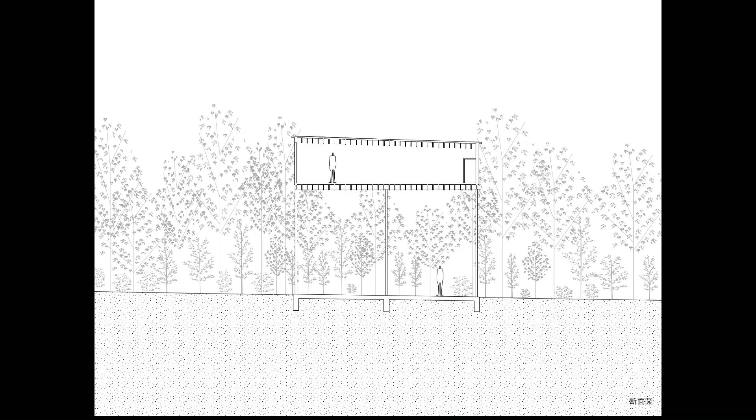I really focused on the pilotis in this project. Of course it wasn't simple, but in the end I proposed to the client: let's make a very high pilotis in the forest. It has 6.5 meters height, really high as a pilotis for a house. The upper floor is very tight, compact and intimate, only 1.9 meters height at the lowest point to the bottom of the beam. The first floor is made with steel, with bracing, and the upper floor is low-cost traditional Japanese timber construction. It's a very simple construction, and this 6.5 meters is the most important dimension in this project.

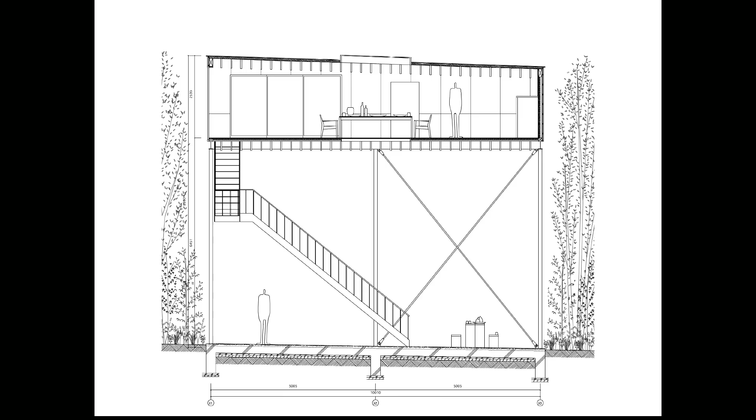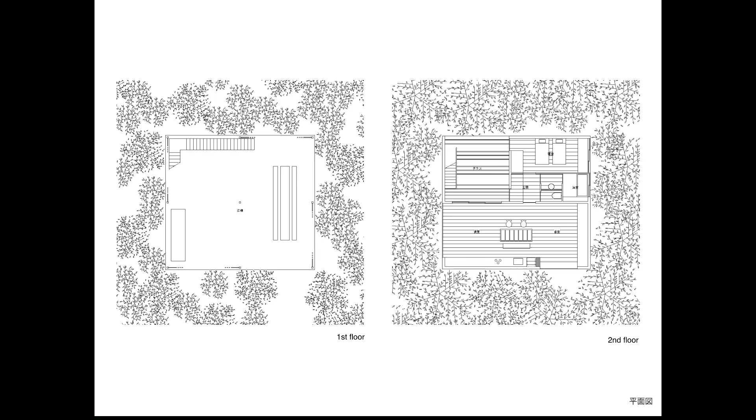The first floor I call the piazza in the forest - it's a kind of public space even though it's a private house, just a semi-outdoor space. The upper floor is timber construction with a terrace, dining space, bedroom, and bathroom. It's very compact, but has very big windows in every direction, so even in this compact space they can enjoy life with nature on the upper floor. This is built in a forest.

Yes, this image is maybe the easiest for me to understand.

6.5 - I already mentioned this five times in the lecture. When I study with models, I always develop the project with models, comparing various dimensions and proportions. Proportion is for me maybe the most fundamental thing in the process. But proportion is not for beauty, not for order - proportion is for a sort of new relation. This is really the core of my project.

What is a new relation? When I see the pilotis which is 5 meters height, it's really still architecture, architectural space. And I see also 7.5 meters height, I notice this space starts melting into forest, melting into nature. So for me, 6.5 is a kind of in-between dimension, in-between proportion, which is still architecture, but at the same time it's nature.

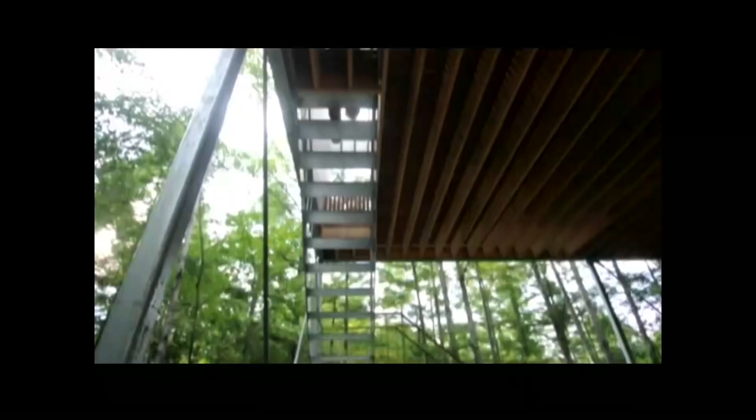I like this sound of the step of the stairway in the forest. You wake up in the morning, put the hammock between the stair columns, prepare brunch with a friend, drink even in the morning, and have a nap on the hammock.

I know this is not a normal house, but still it has commonality with the local buildings, the normal buildings in this area with the pilotis. So what I did was just to change the proportion of a normal pilotis building, I would say.

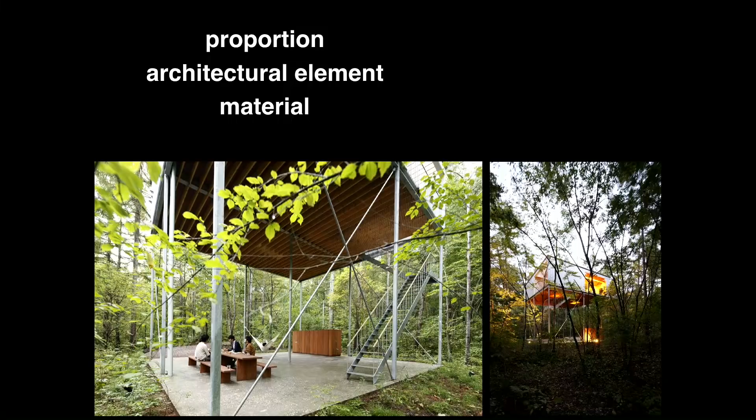The architectural element and the proportion - and as you noticed, for me material is really important. I would explain here now about the amplitude. For me, proportion, architectural element, and material are really fundamental in the process. And all the time, the proportion is not for, as I explained, beauty or order,

but for something like a new relationship between, in this case, architecture and nature, or ground floor and upper floor, and so on. So the relationship between spaces is always organized by a certain proportion, and it takes time to find this proportion. Time. I want to open my building to newness and oldness.

Architectural elements like roof, balcony, or window are really nice because they're filled with the wisdom of human beings, a lot of knowledge inside. I don't know who started the pillars, I don't know who started the balcony, but it's a kind of open resource of architecture.

I also believe we can still develop, we can still find a new way of using such an element. I love to open to opposite directions - oldness and newness - in the architectural element. This is really exciting.

Also, material for me is about gravity. I'm not a magician, I'm not a god, so I cannot erase gravity itself. But I know the space can have the power to shift the sense of gravity. As I explained about the ceiling of this place, it's really totally different from the pilotis of Le Corbusier - I'm not saying which is better, but in a way, the sense of gravity can be shifted through the use of material.

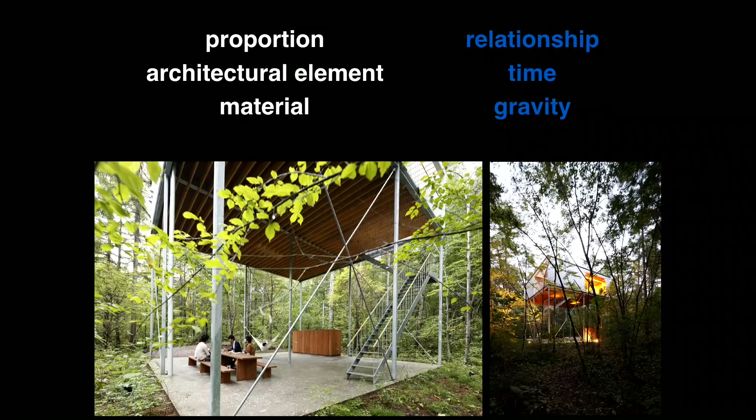Always relation or time of architecture or gravity is trying to shift, trying to expand, trying to find out the new amplitude in every project. This is always something I'm struggled with in every project, in any program.

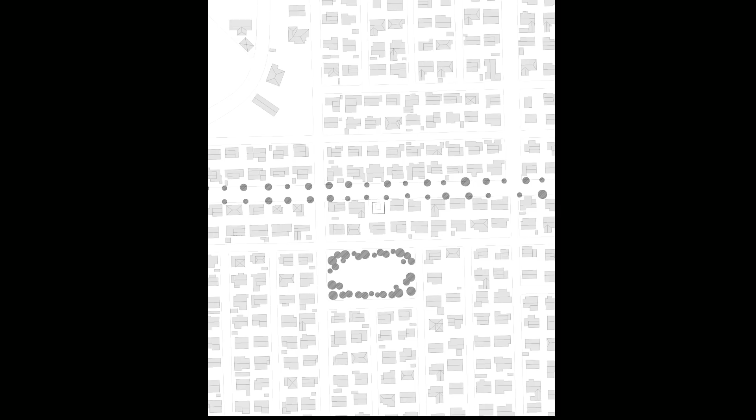I would show the projects maybe chronologically. This is a small house for my sister. She worried when I started my office because I had no projects, so she asked me to design her house. She's very good, she's a teacher at an elementary school, and she asked me to design a study room. It's a very small dream, no? She just needed the study room to prepare stuff, sheets for the class, for the students, and so on. She's a good teacher.

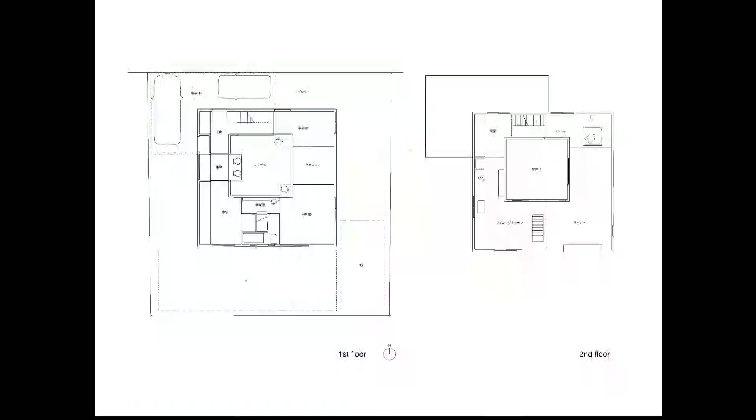I know her family well, so somehow I wanted to start from her request, the study desk, study room. What I proposed is to make a look - this is a plan, I put the big table in the middle of the house. It's 4 meters by 4 meters, really big as a table, as a desk to work on. It might be too big. But this table is surrounded by the study room and two kids' rooms.

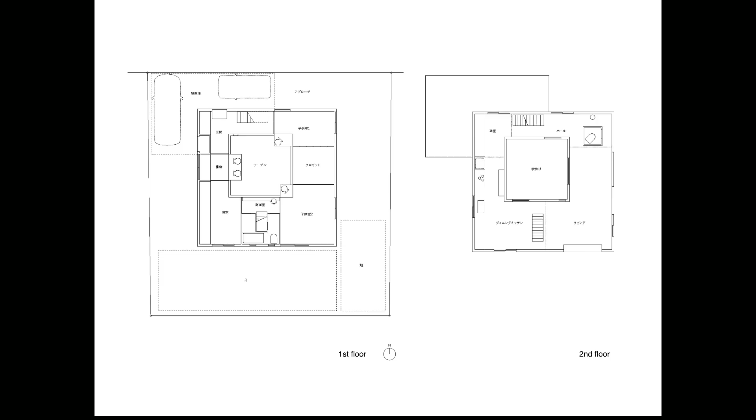From her desk, on the opposite side of the table, the son is working or playing. But at the same time, they are staying in each private room. This table room has a void here, so this is a void. So the living room and the upper floor have an O shape - they can run around.

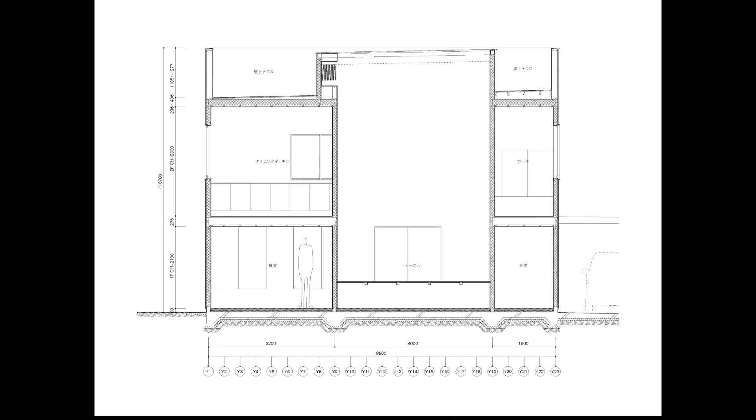In section, the table room has a void, also glass on top, so it looks like a courtyard. This space is kind of a combination of courtyard and a monster of a table. From her desk, on the right hand you can see the young son, left hand the older son, but they are now staying in their own rooms - they share this huge table. Here there's a skylight on top, but it looks like an outside courtyard space, as if we see the external wall rather than inside. You can see the big window and the rear window over there, so you can look up to the sky diagonally.

The son's room is very normal size, like 12 square meters, with a 2.1 meter high ceiling. It's a very normal room as a kid's room, but when you come close to this chair, immediately you can connect to the father on the upper floor or your brother on the opposite side of the table. From the side, it looks like this, or like this - they always share this huge table.

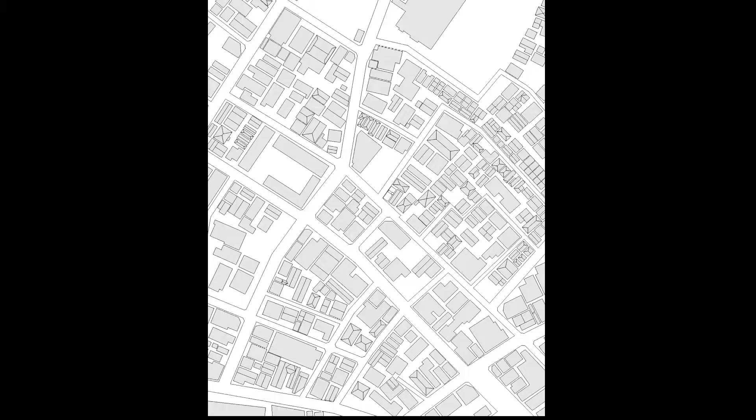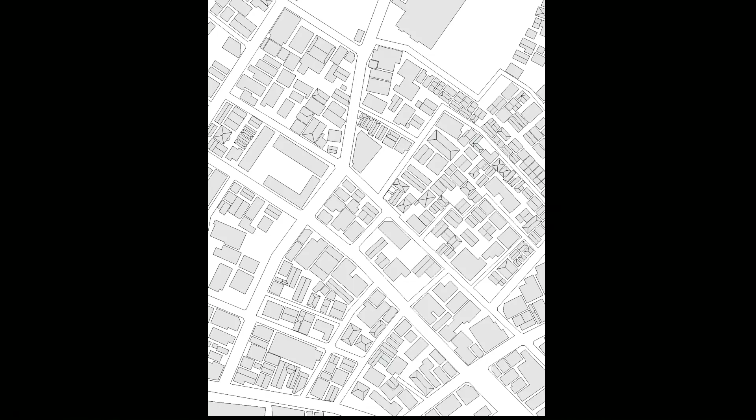This house is a very small house in Tokyo. The site plot is only 45 square meters. It's really high density in the middle of Tokyo, named Gotanda. This is the house on the corner - somehow you can see it, it's really small. As you see, this area has various sizes of buildings. This is an office for a taxi driver, this is a factory for sweets, here's an elementary school, and over there a huge supermarket, and so on.

This area, we call it the semi-industrial area - it means you can build anything in Tokyo. So the program size, there is a height regulation, but in a way various types exist here. We still have a sort of common rule in Tokyo though - as you see, there's a gap between the buildings. The gap is something fascinating in Tokyo. All the time we need to keep a distance from the boundary line, at least 50 centimeters, meaning when we build, we always create a gap between buildings of around 1 meter.

Of course the building itself is the purpose, the production, but as a sub-production, all the time, always, the gap is created. This is a small site, so somehow I focus on this gap, because somehow I want to expand the boundary line, and also I try to find the new image of life in Tokyo.

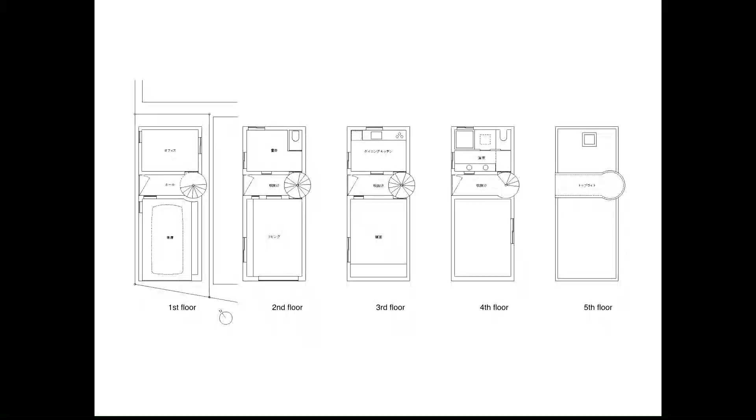This is maybe what I struggled with in this project. What I did in plan — I always develop my projects in section, but this is the exception. In this project, the position of the spiral stairway is important. I placed it a little bit outside of this wall, like a hip, coming out into the gap between the neighbors.

So when you come up from the living room to the dining room like this, your body comes out into the gap between the buildings. And as you come up more, your body is in the gap inside the building. So all the time, in the experience of the spiral stairway, it's a gap and outside, then a gap and inside, in turns. This is important.

Let's enter. There's a door which opens to the spiral stairway. It comes out a little bit to the neighbor. This is a window of the neighbors.

This is the study room of my client's wife, and there's a tapestry on the opposite side of the gap, so it looks as if it's the neighbor's building. Actually, this is the neighbor's window, so it has a strange sense of distance — the same sense of distance between them.

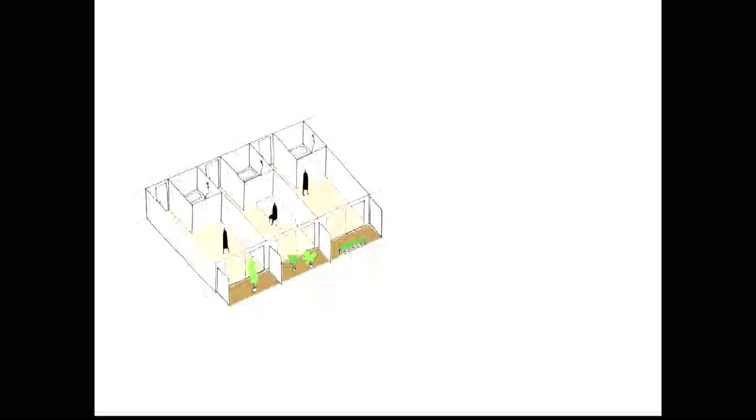And I visited the site again and looked at such a normal apartment in Tokyo. Actually, when I was a student, I lived in such an apartment. On the north side there's a common balcony, common corridor and a door, and a very small unit bathroom - very Tokyo size, super tiny. And a small room, Tokyo size, very small room.

And on the south side, mainly towards the street, there's a balcony. In the regulations in Japan, we need to keep two ways for escape, so this wall between the apartments can be broken when something happens, like a fire. So it works for the escape route as well.

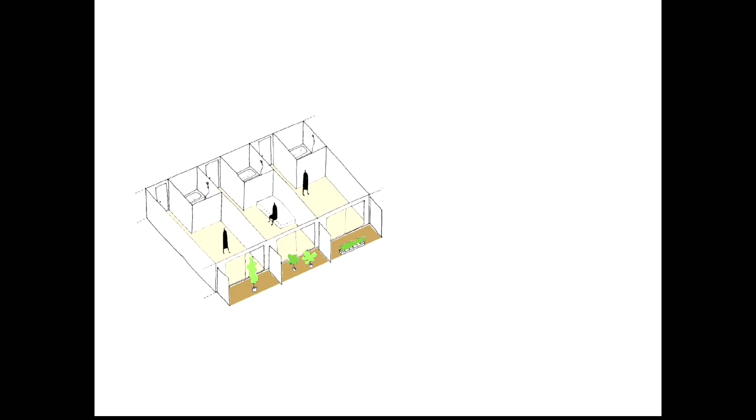So in the end, on the balcony all the time they put a machine for hot water or air conditioner. Sometimes residents put garbage or an old bicycle on the balcony. So in the end, the balcony is not a space for life - it's just a useful space to put something.

And it's very bad. Also the bad thing is, as a result, this kind of dead balcony makes a facade towards the street - this balcony with machines and garbage makes the facade of the cityscape of Tokyo. This is the reality in Tokyo now, and I really don't like it. I think this is because architects have never tried to tackle the balcony issue in Tokyo.

And yes, I had an issue - the request from the client. In the end I proposed this idea: let's make a variation with various balconies instead - let's make a tall balcony, or a long balcony, or an L-shaped balcony.

So in the end, the unit itself has a sort of variation, but rather than the plan or shape of the room, for me it's really important to make a character from outside, from the garden, for each unit. Now I call it garden, so it's a terrace.

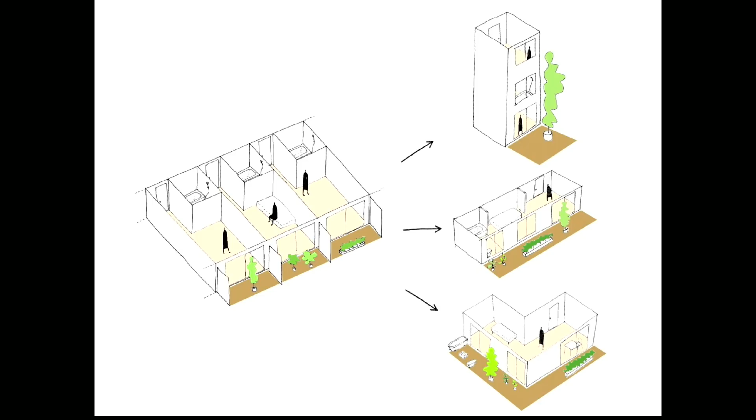I don't like to decide - it's a very big problem as an architect, but I like to compare. Like I explained in the Pilotis Forest, I compare with various heights, I compare with the proportion of the terrace. And little by little, it's really important to collect subtle notices, little notices, in the process rather than a clear, nice idea.

Idea is sometimes dangerous because we believe too much. Every day we think, this idea is fantastic, this is the final idea or something like that. But the next day we notice, this is not the best. Always our idea is changing, but the model itself - of course the model is an object - but it's a really nice tool to be objective about the project.

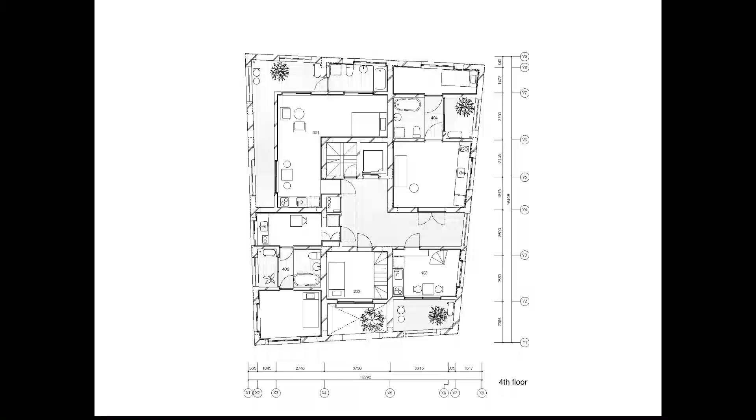It's a bit complicated, so I will show 4 types. The first type is an L-shaped terrace. So this is a common corridor - when you open this entrance door, it's not the room, but a terrace, like this.

It's not the room when you open, like this. This is a common corridor. When you open the door, there is a second door. This is the real door in order to enter the room. So this is a semi-outdoor space, and in the end there's a bathroom.

So inside, you can feel really protected with this L-shaped terrace, covered terrace, like a buffer zone between inside and outside, or private and public. So you don't have to put curtains at the window. There's a sort of sense of distance between them, like this.

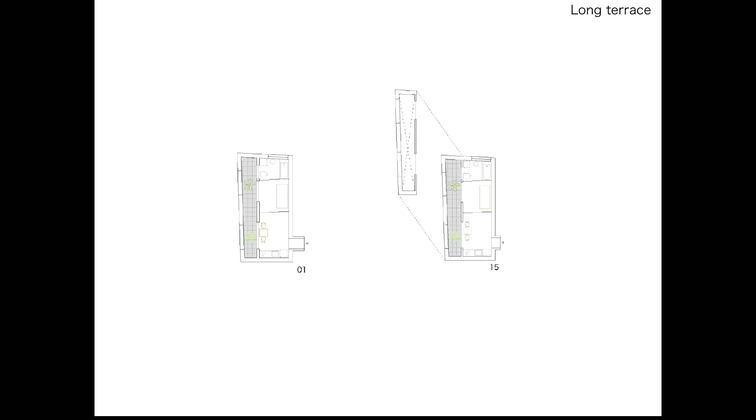Or long terrace type, as I explained. Normally we put here a super tiny balcony, but I changed the position and proportion. From the dining space, from the bedroom, from the bathroom, all the time the long balcony is just beside you, like this. So a large amount of sunlight and wind comes in.

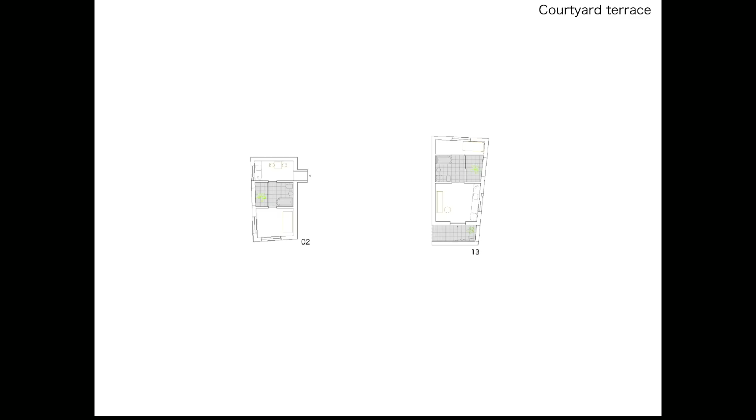And the courtyard terrace type - this is a kind of combination of bathroom and terrace, but which divides the dining space and the bedroom. From the kitchen you can see the bedroom on the opposite side of the terrace, like this. So like the house in Gotanda, there's an outside space, courtyard, two rooms - a gap inside the one apartment unit.

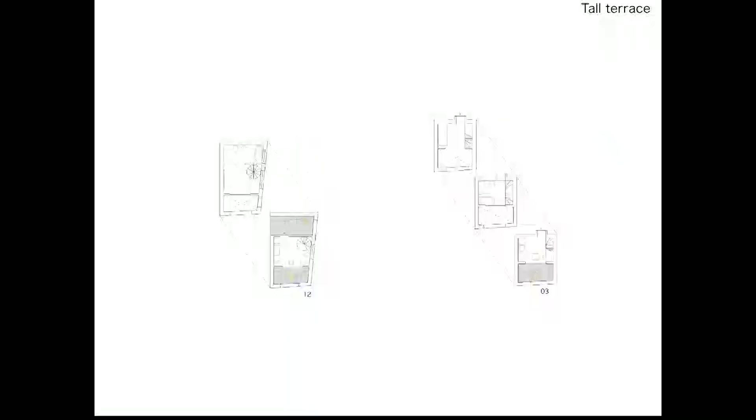And the last one is the tall terrace type. It's very tiny, like 10 square meters, but it's really high, like this. It is high.

So the first floor is a dining space with a working desk. He's working here, like SOHO - he is here, this unit. It's 3 stories, 10 square meters each, so in total 30 square meters inside. On the second floor, I put the bathtub and toilet directly on the floor, so you can enjoy bath time just beside the terrace.

And the top floor is the bedroom, and when you wake up in the morning you can look down to the street like this, through your terrace and the garden and the street - a diagonal relation.

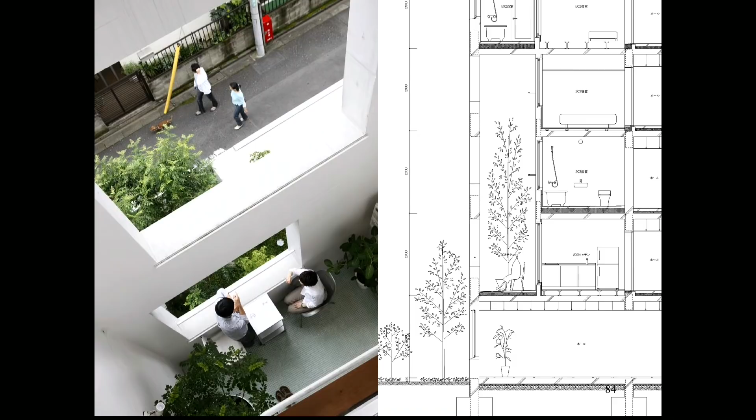So yeah, something like this. I prepare various types of proportion in balcony, each balcony, for 24 units. So when you wake up in the morning and prepare breakfast, you can look up to the sky, or you can look down to the street. The proportion gives a sort of dynamic relation between inside and outside. It's totally different from a normal balcony.

But actually for him, for her, I don't know, it's difficult how it's connected. Perhaps this hall, this room, this outer space can belong to here, or he is there, or he is where. So even if this terrace opens literally to outside, completely to outside, he still keeps a sort of anonymity as a resident. So I think it's a kind of nice contradiction - it's really open, but from outside, very semi-transparent.

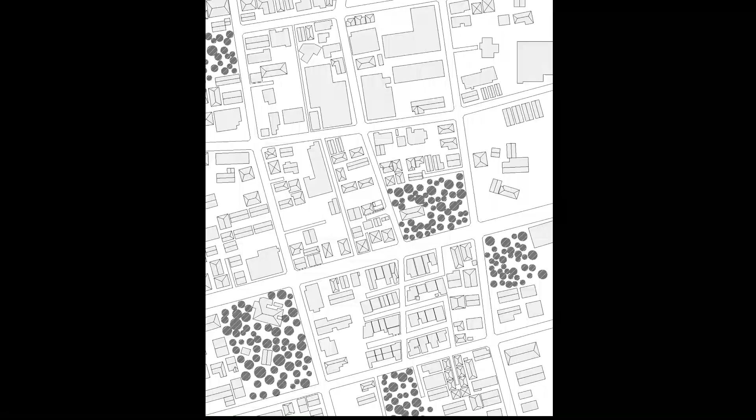One more small house. It's also in a residential area in Tokyo, and this area has strict regulation of the height and the size. So actually this roof shape, a gable roof, is almost the same height, same footprint as the neighbors.

Almost totally the same. And what I did - two things - in a section again, I like section very much. One thing is to make a very high living room on the ground floor, 4 meters high - this is very high in a Japanese house. So the upper floor, because the outline of the building is defined by the regulation, is almost like an attic space. It has a 1.2 meter high ceiling, really like an attic space.

It's very intimate. And the second thing I did in this section is to make a very, very transparent floor, like this, like a deck. So actually we give a gap between the timber, between the beams. So because I put the skylight on top, sunlight is coming down into the living room on the ground floor, and sunlight and wind come through between them.

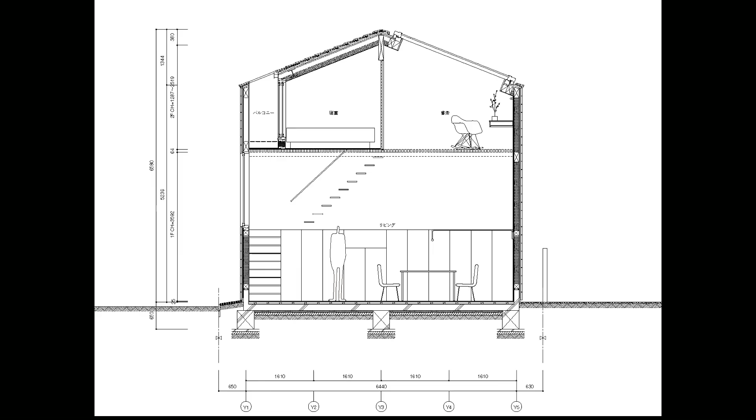This is 2 by 3 - you know the 2 by 4 system, which is maybe very familiar in the States, but we have this 2 by 3. It's 38 millimeters by 63 millimeters, like this. So it's not timber for structure - they use it for furniture or small things. But in collaboration with Ono, I always collaborate with the structural engineer, and Ono is a very excellent guy. I think one of the characteristics of contemporary architecture in Japan is collaboration with the structural engineer.

I was teaching at GSD and talked with architects in the States. There, when we finish the design, we give it to the structural engineer, and they calculate and give some feedback. But in a way it's totally separated, the design and the structural engineering. They complained about it.

But in Japan, fortunately we have a culture or custom to collaborate really equally. So when I designed the basic design, almost from the beginning, just a concept, I started to talk with the engineer about how to build, how to deal with details, the pitch, the bolt and joint. Really from the beginning we dealt with small things and big things at the same time. It's really important to deal with construction for me.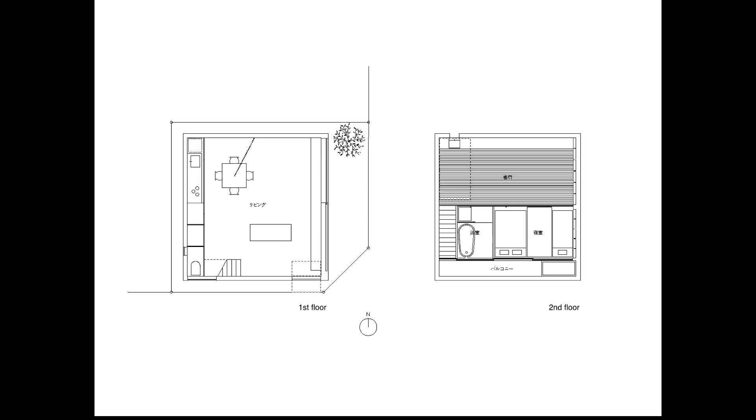And yes, this is a beam, maybe nobody uses it as structure. The plan is always simple. Ground floor is just living room, upper floor has a stairway, and I call it the study room, which has a louver floor like a deck, and bedroom, bathroom, and two bedrooms, and the balcony on the south side.

We made a mock-up in order to check the gap between the timber. In the end, the gap was 3 centimeters. I used this because my client asked me to make a wood house, something wood. They lived in a normal apartment made of concrete, and had a dream to live in a space with wood. So I tried to emphasize this request, and also the exterior should be wood, but in a new way.

This is the Setagaya area in Tokyo. A lot of rich people live there. It's a nice area with a big park, so around here there are a lot of nice apartments for rich people, with stone and brick and so on. So even if it's a small house, I wanted to struggle, not a fight, but to be equal as an existence with such rich buildings.

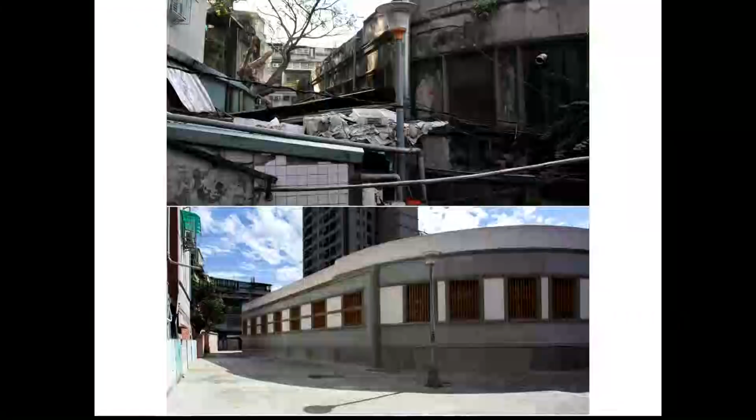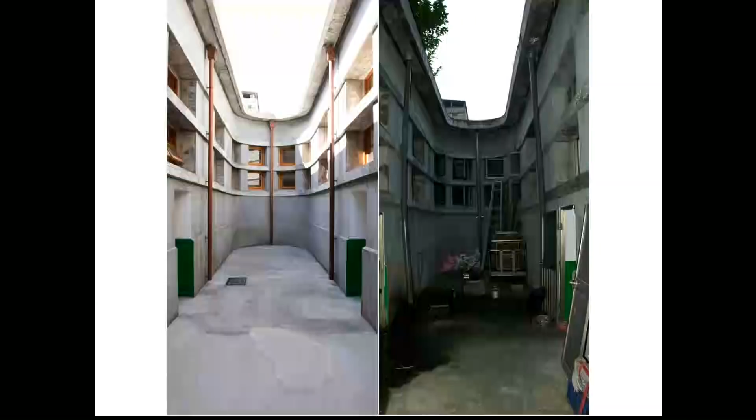This was maybe 2 years ago, and they just cleaned it up. But this situation—this is also an illegal extension by local people. Inside, since at the time there was no ventilation machine, and they sell meat, fish, or vegetables and many other things here, they needed natural ventilation. So there are a lot of windows like this.

Also, they had a problem with water—after typhoons, water is always coming in, especially around this ventilation hole. So they asked me to make a new waterproof roof, since there's a problem when it rains. So I proposed a solution.

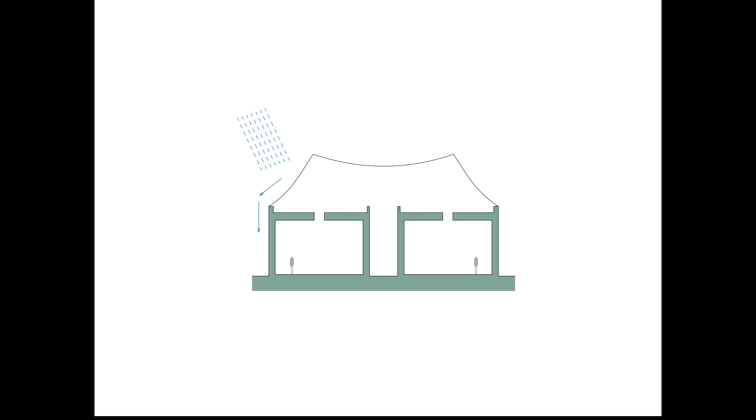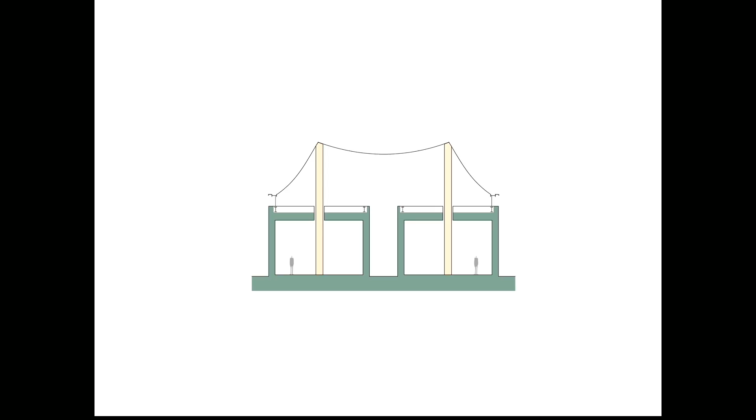I found this ventilation hole—it was 60 centimeters in diameter. So I put a roof above this roof, inserting sticks like this, because this is a historical building and we cannot put any weight on the existing roof since it's a very old concrete building—it's very dangerous. But they said it's okay to put something on the ground floor because it's strong enough.

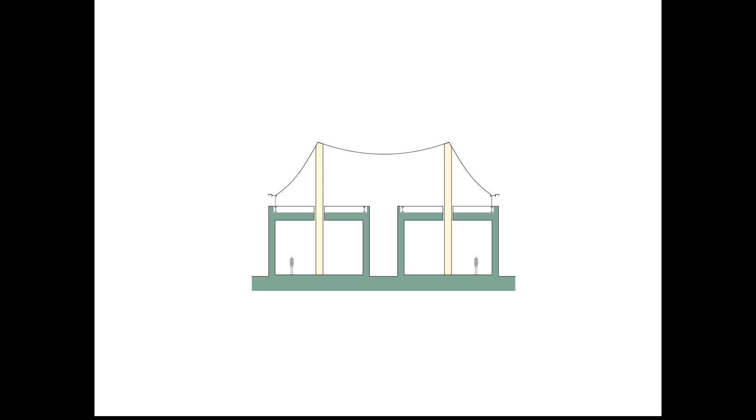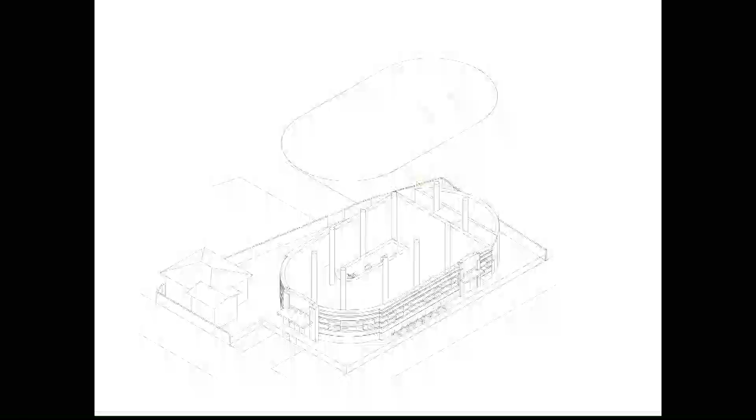So I decided to put huge, massive timber columns into every hole of the existing ventilation holes. There's also a steel beam here—that's the structure. This way they get the extension of the new floor on top without putting any weight on the existing structure, and I put a membrane on top. They were so happy to have this double surface idea.

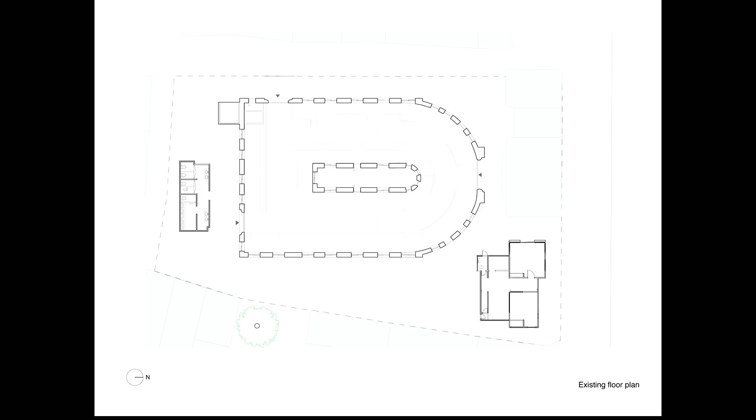Also, they asked me to put in a public toilet, so I placed this moon-shaped public toilet. There was an old, dirty public toilet there, so I redesigned it, since the shape was very strange. I tried to make it equal in every direction with a symmetrical plan.

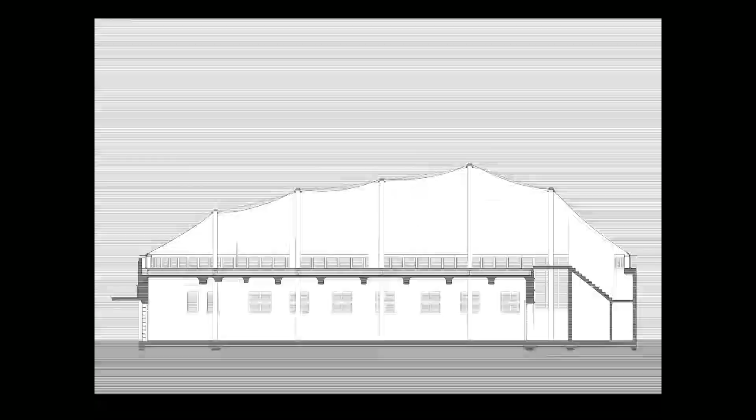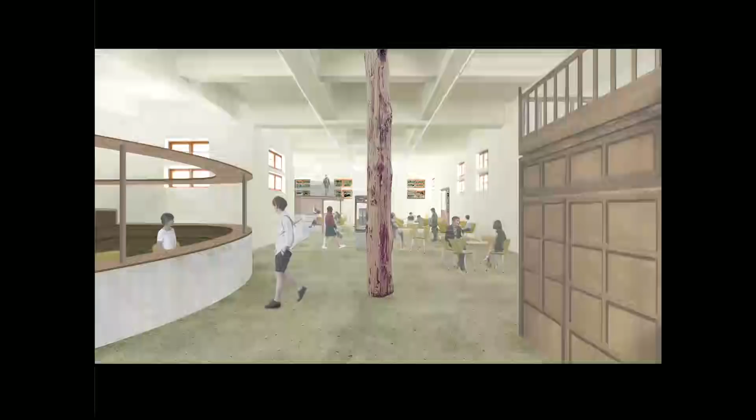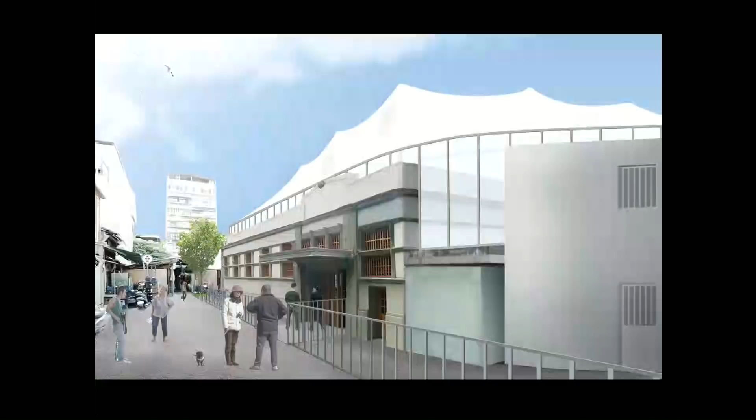Here is the sharing office on the ground floor, and the atelier for artists, plus some gallery and workshop space on the upper floor. The timber wood columns separate the programs inside. Also, it makes a nice relation to the illegal roofs in the surroundings—this one isn't illegal, of course, but it's really nice to have this conversation between local buildings.

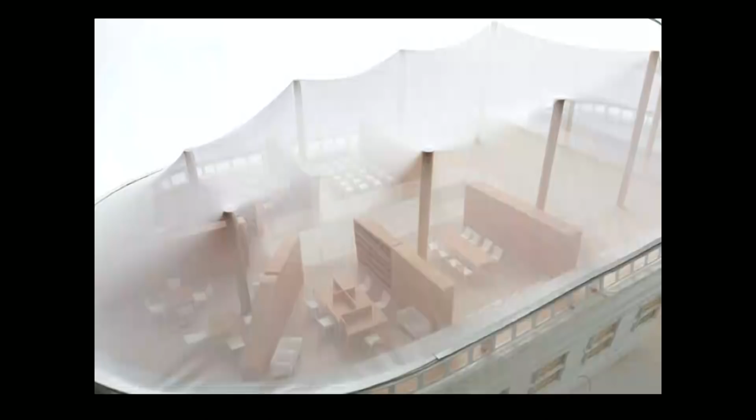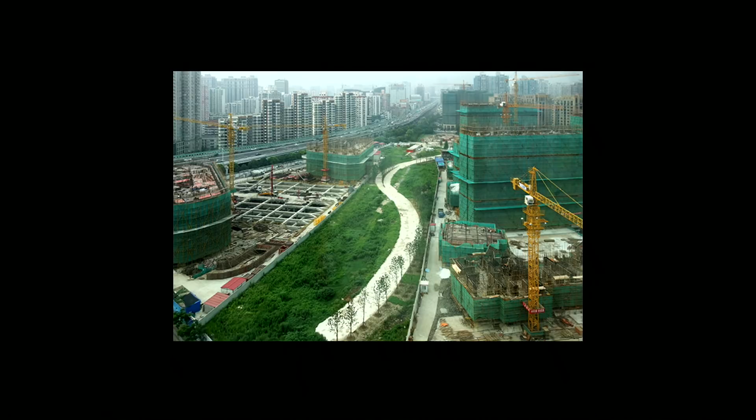This is another project I'm doing in Shanghai, China—a sort of public rest space in a park. As you know, Shanghai is a very crazy city with a lot of skyscrapers like this, and they're still building more, even a bit outside of Shanghai. My site is in front of South Shanghai Station, where they are making one of the long parks in that area, 5 kilometers in total. I was asked to design a sort of gazebo in the park.

But I need to say the skyscrapers here are very ugly—really very normal, banal skyscrapers for offices and apartment buildings. It was a bit difficult to start the design. But on the other hand, I really like the public space in China—they enjoy public space very much. It's totally different from Japan.

They do Tai Chi in the morning. It's cool.

So I made research on the typology in China, and I found this ting. This is a Chinese traditional gazebo in a public garden. Of course, for the rich guy with a big garden, he puts several pavilions in a park, and they invite guests and make a tea time. And all the time it's a circle shape.

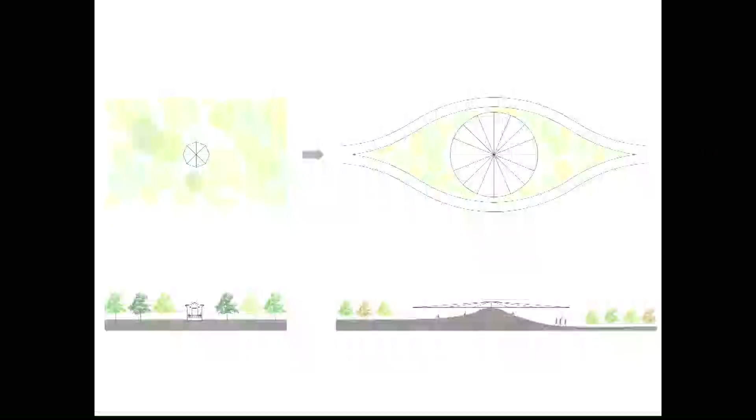So it might be a sort of hint to start. Let's make a contemporary thing in this area, and make a big roof.

Yeah, it's surrounded by my site. This is the site, it's a bit strange. It's an eye shape, like eye shape, and I put this circle in the middle. Look, this...

...skyscraper, and they are walking and living in here or there. And I think they lost something. They are surrounded only by vertical things. So I propose to make a really horizontal space.

My building, it's really horizontal. It's really connected to the ground. And also, I decided not to use any vertical element like column or wall and so on.

So at first, it's surrounded by the garden, the natural garden I also designed. And I make at first a little hill, which is 3 meters height. And I put the huge roof on top of the hill directly without any column.

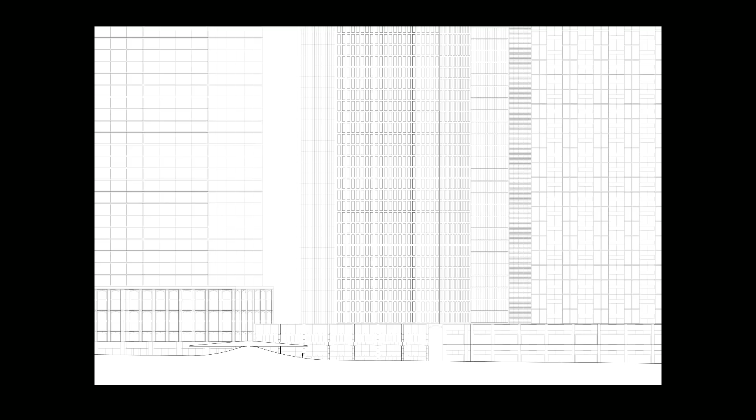But of course there is a structure inside, so somehow I try to hide this structural element. And this is very big, which is 34.4 meters diameter. So in the end, the roof itself is 1,000 square meters. It's big.

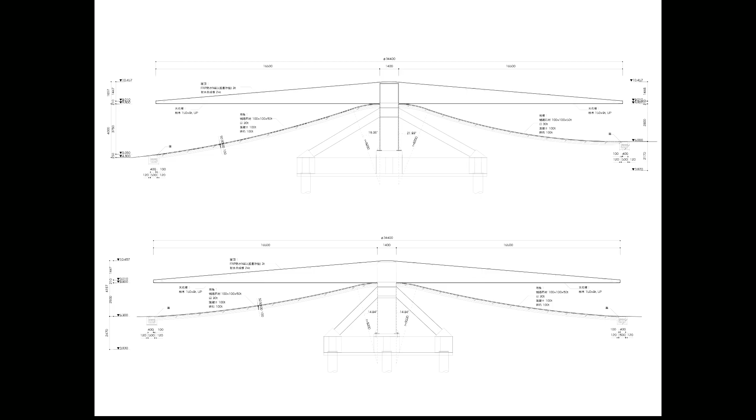It's a steel structure, it's a cantilever. This is a structural drawing.

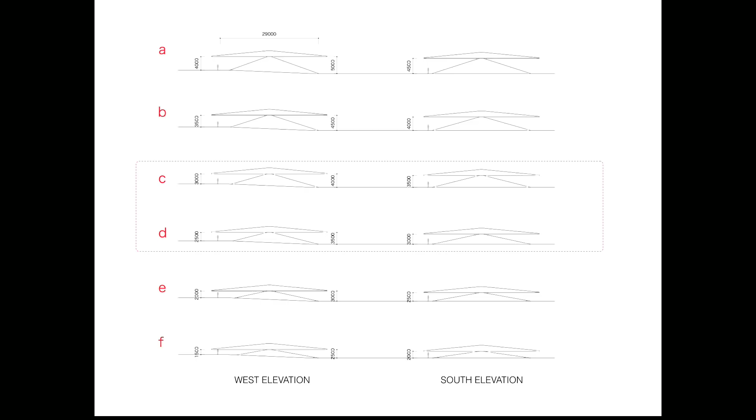This is a study of the height, of the proportion of the hill, like this, and also the proportion of the top of the hill is very important—how it kisses the ceiling.

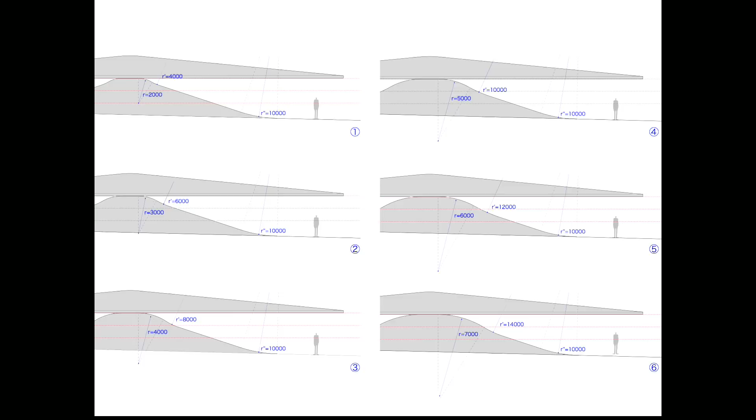So we made a lot of models in order to find a nice touching, a nice kissing to the roof.

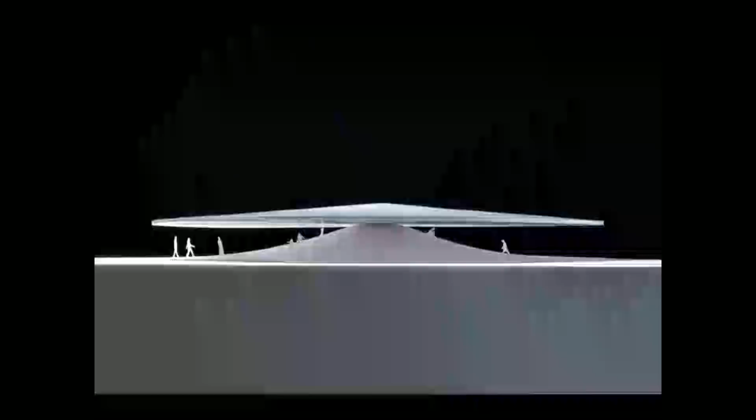This is a model. So from here, they don't have to see any skyscraper, only horizontal landscape. It's really connected to the ground.

Timber with gloss paint in order to reflect the green surroundings, like this.

So they can sleep on the hill, or in a flat part, they do Tai Chi in the morning. Very horizontal.

It would be finished this year or next year. And this is the last project to show today, a project in Italy, the first project in Europe.

Yesterday I got an email. You know, Italy is very difficult to build in, and very slow. But in the end, yesterday I got an email saying they start construction next week, and it will be finished in the middle of August, I hope.

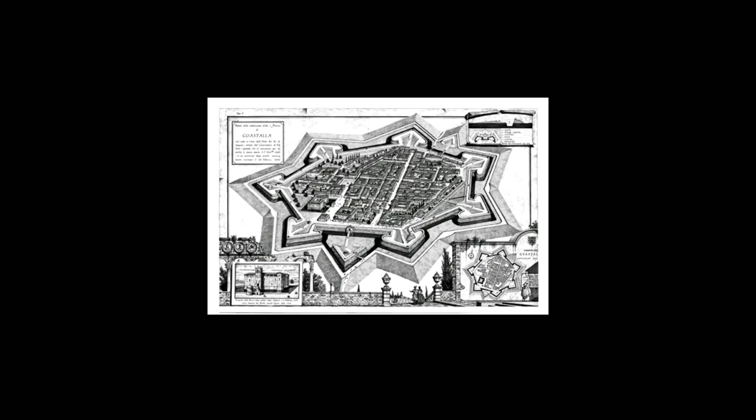And they asked me to make a new chapel in a public cemetery. There is a sponsor, a guy from a marble company in Italy, based in Vicenza. And he had one request: made only of marble.

It's good, no? For Japanese, it's amazing to make a building only by marble. But he says, but in a new way. It's good, no? So somehow, this is very simple: the building made by marble in a new way.

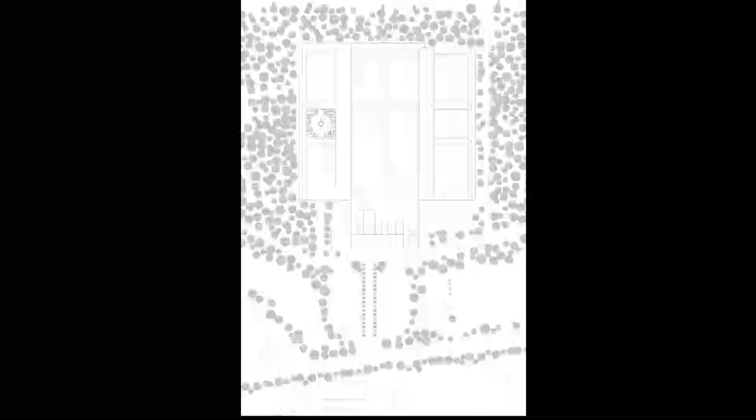And the city mayor gave me one copy of the public cemetery. It's surrounded by the portico, like this.

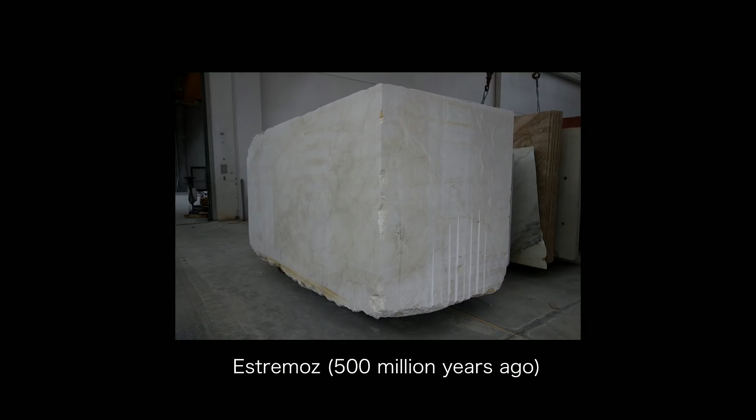And I had a big discussion with the guy, and in the end I chose this Estremoz, a Portuguese marble, but actually it's 500 million years old as a marble. It's very old, but perhaps if we can find a new way of using this super old material, it might be something nice. It's very old, but something new at the same time.

And we started to find some image references of spaces with stone or marble, like a cave. Or I like this kind of window.

For me, this is one of the images of a window in Europe. I know you don't have such things anymore, but I think this has a lot of things—it's a sort of set of window, bench, and niche. I call it a set beside the window.

And it might be one of the hints in this project, because the city mayor asked me to prepare some benches, because at a ceremony in a cemetery, maybe 80% of the people are old people, so they need to have a rest space, like a bench. So okay, bench—but only a bench is not something new as a project.

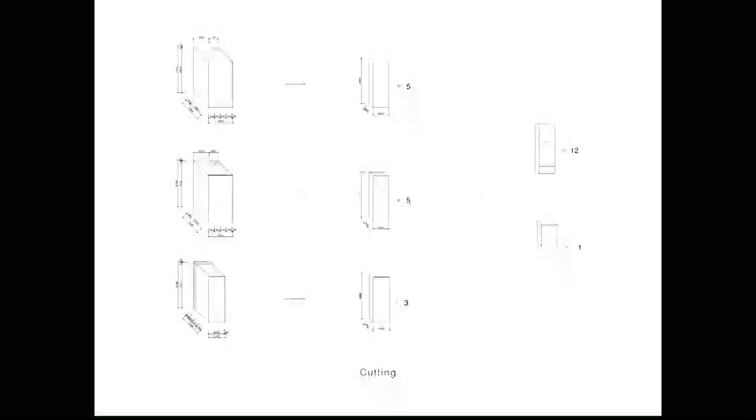Because it's surrounded by the portico, it's a repetition of arches. So this niche with a statue was one of the hints. And yeah, he gave me 3 blocks of that marble, and somehow I try to find the most efficient way of cutting.

The plan in the end. We made this chapel only by wall, without roof.

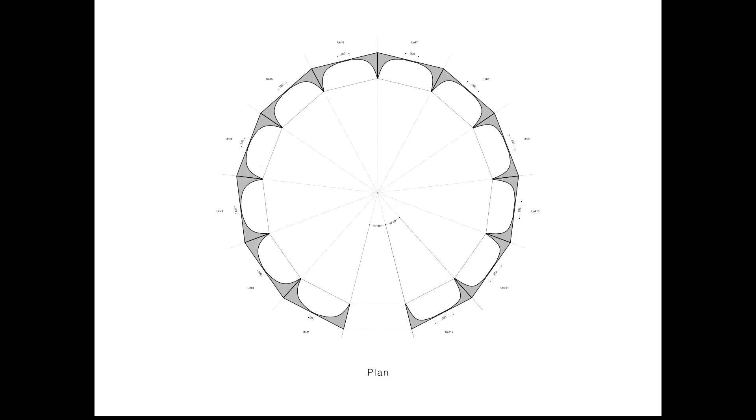It has 12 units, but each unit has 30 centimeters thickness. But I asked to dig each marble, and the thinnest part is only 1 centimeter. So each hole would work for the bench or niche, and on the back they have a sort of window because it's thin enough for the sunlight to come through.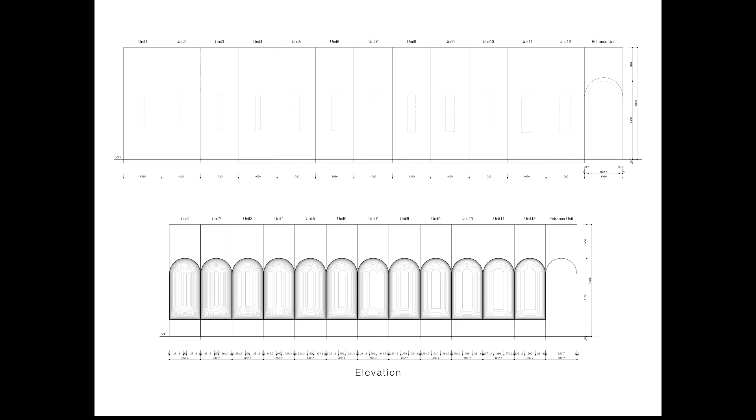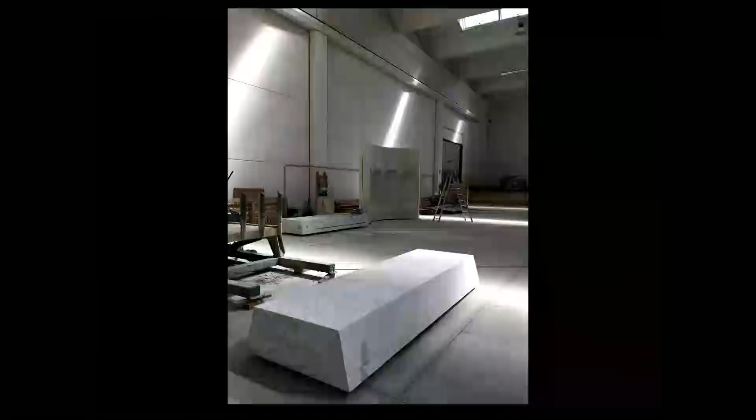I was so impressed by the precision of the marble factory in Italy. They are so precise, like carpenters in Japan. I felt a long history in their technique. So precise. In the end, this is a piece I checked in a factory.

At first, we built it at a fair in Verona last autumn, and light is coming through. From outside, it looks like just a massive marble block, but inside...

12 benches or niches have a window. So this is a bench, you can sit. During the ceremony, you can have a rest.

It's inside, without the roof. So depending on the movement of the sunlight, every hour the brightest part is changing through the day, from morning to evening. This is my hand.

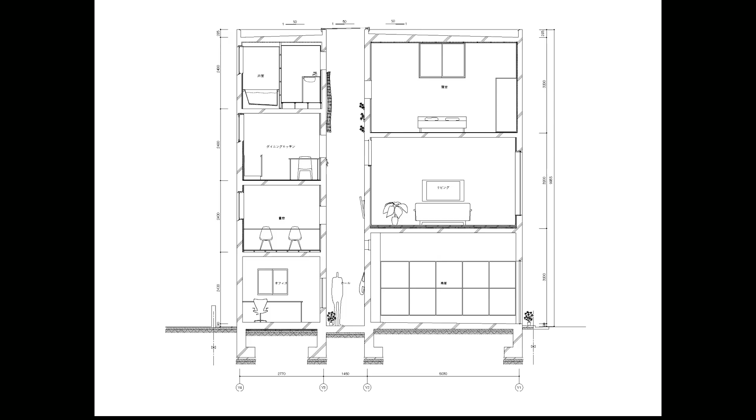Yeah, exactly, you are saying about these windows, right? Especially the top floor. Top, you mean this? Yeah. So for me, it looks like from washing your hands, you can see into the bedroom. From this dining kitchen, you can see through this one, two, three windows, and the view, right? So this is two buildings, but it's one private house. So somehow, with a combination of various holes or windows, I played with various views on the opposite side of the neighbor's building. So this is one of the points in this project.

So do most of your iterations deal with the visual relationships between the volumes? About these windows, yes. Yeah, also you can see things, additions. Yes.

Sorry, I cannot. Sorry, thanks for your amazing lecture. And that gazebo project in Shanghai, the 4 meter by 4 meter, reminds me of the other project which you didn't show.

The Nippon Design project. I was lucky enough to hear the explanation about the several design intentions while you were designing the Nippon Design Center, like manipulating the floor height. And what was really interesting was the giant table that you designed in the office. So I have always been curious about the design intention and design process of that giant table in the middle of the office at Nippon Design Center.